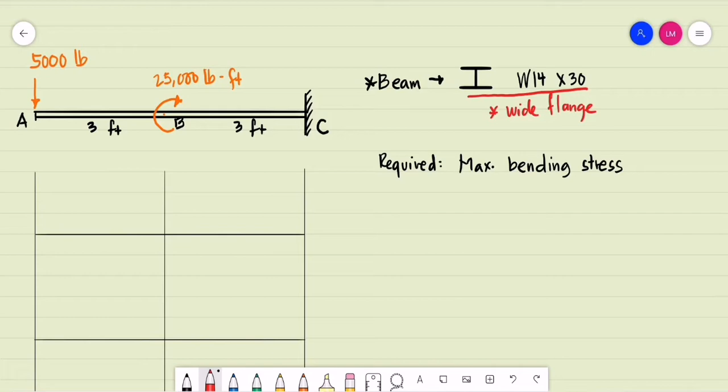Since we are required to compute for the maximum bending stress, we need to compute for the maximum moment. So for this beam, to start our solution, let us compute for the support reaction.

Since this is a fixed support, we have one vertical reaction at C, and a moment reaction at C for a fixed support. I'll be assuming that it is a clockwise moment. Let's say this is the moment at C.

Computing for the support reactions: summation of forces vertical equal to 0, assuming upward forces to be positive. Basically, we have R sub C equal to the concentrated load at A. The reaction at C is equal to 5,000 pounds, and it is upward.

For the moment at C, we do the summation of moment at C equal to 0, clockwise moments to be positive. So we have an applied moment, 25,000 pounds-foot, positive since it is clockwise, and positive 25,000 less the concentrated load 5,000 multiplied by 6 feet from A.

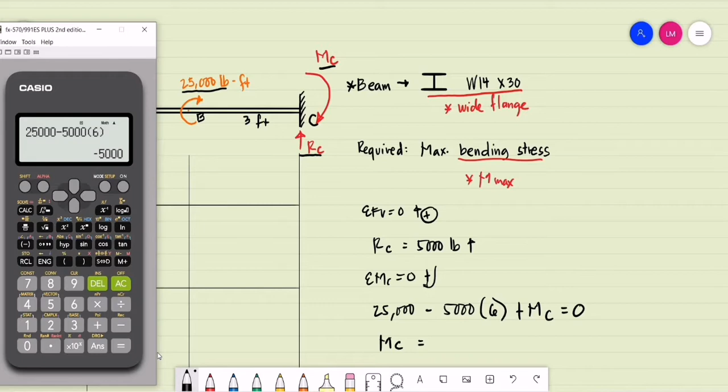Then the moment reaction MC is clockwise, assumed to be positive, and is now equal to 0. So the moment at C is equal to 25,000 less 5,000 multiplied by 6, which is negative 5,000; transposed, that becomes positive 5,000 pounds-foot.

So we have a correct assumption. This moment is clockwise; the moment at C is clockwise 5,000 pounds-foot. And we have the reaction at C, which is upward 5,000 pounds.

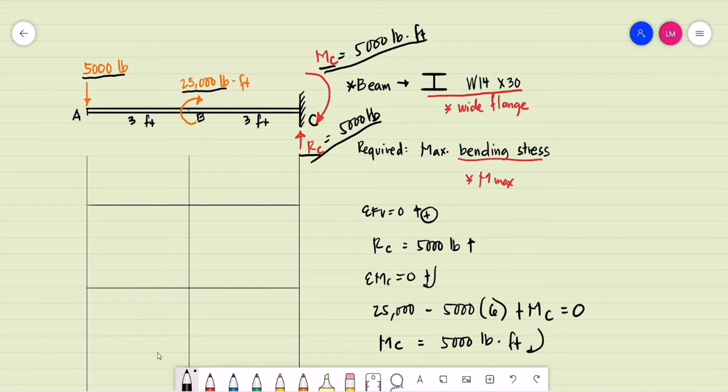So we are now ready for the shear and moment diagram. Starting on our shear diagram, starting at A, at 0, we have 5,000 pounds downwards, so we go down, a magnitude of negative 5,000.

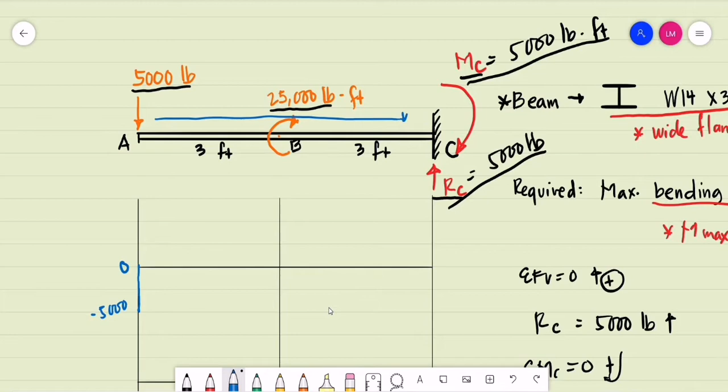As you can see, we don't have a change in shear from A to C, so we maintain this magnitude of shear, 5,000, that is negative 5,000 from A to point C. Then at C, we have a vertical reaction of 5,000 pounds upwards, which gives us a value of 0. This is our shear diagram.

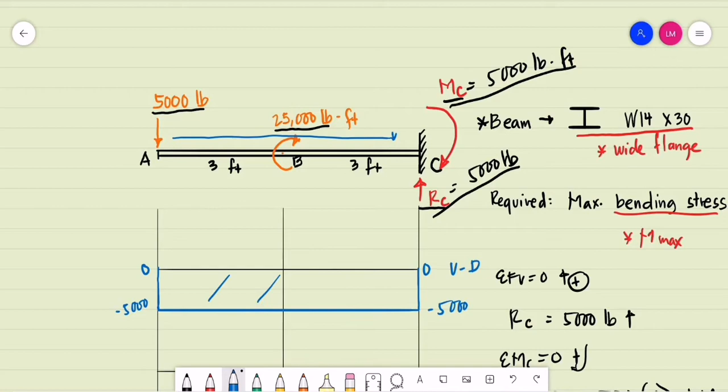So for the moment diagram, we may use the area of the shear diagram for the computation of the moments. Starting at point A, the moment at A is equal to 0 since there is a free end.

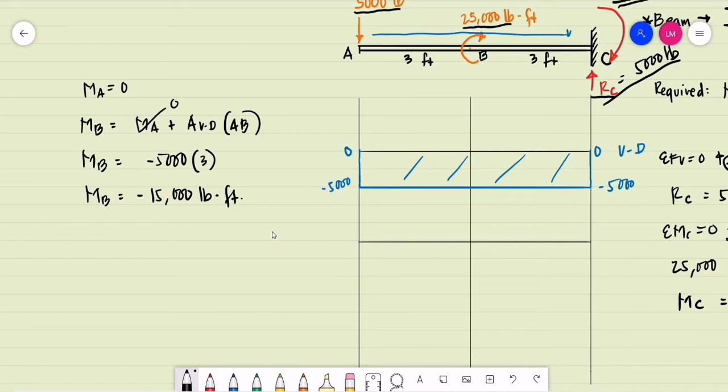If you are to compute for the moment at B, that is equal to the moment at A plus the area of the shear diagram for segment AB. The moment at A is 0, and we have negative 5,000 pounds for a length of 3 feet, giving a moment at B of negative 15,000 pounds-foot.

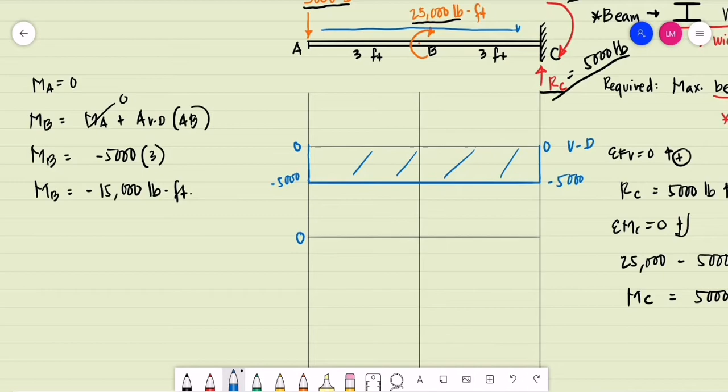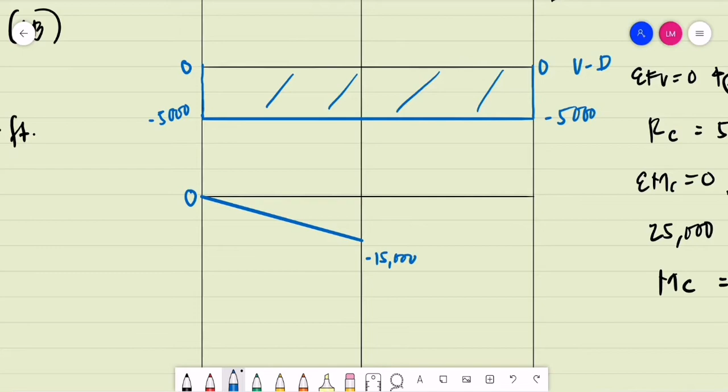So starting at A, this is 0, going to negative 15,000 pounds-foot. But as you can see on our beam, we have an applied moment of 25,000 pounds-foot, a clockwise positive moment. By the way, the degree of our shear diagram is 0 degree, so our moment diagram should be first degree.

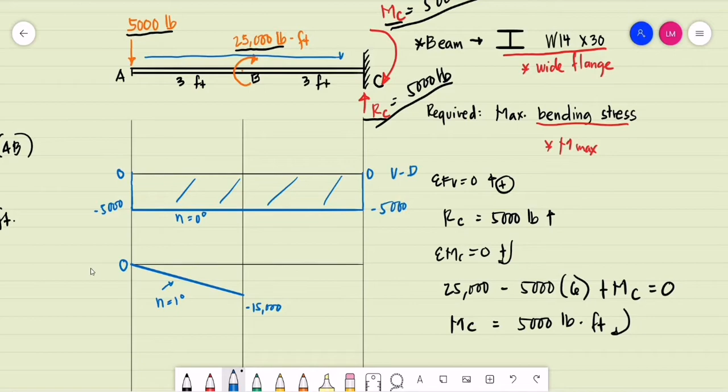So let's say another moment at point B, call it B prime. The moment at B prime is equal to the moment at B plus the applied moment of 25,000 pounds-foot, positive since it is a clockwise moment. So the previous moment, negative 15,000, plus 25,000, gives moment B prime equal to positive 10,000 pounds-foot.

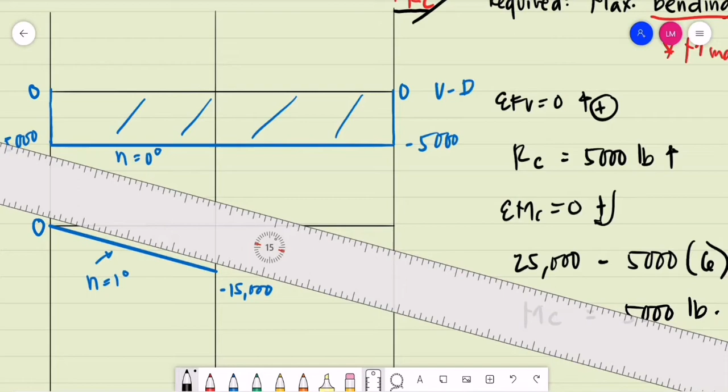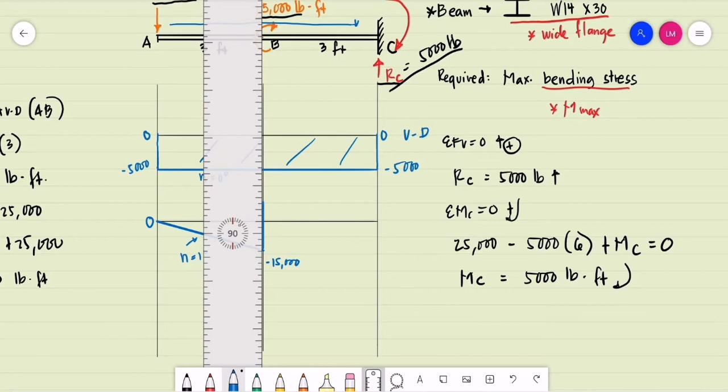So on our moment diagram, from negative 15,000, we go up to 10,000 pounds-foot, and it is positive. So negative 15,000 becomes positive 10,000.

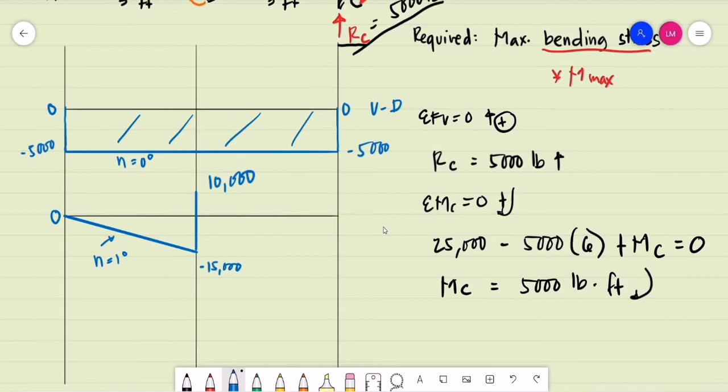Then again for the segment BC, I will be having a negative shear. So let us compute for the moment at C.

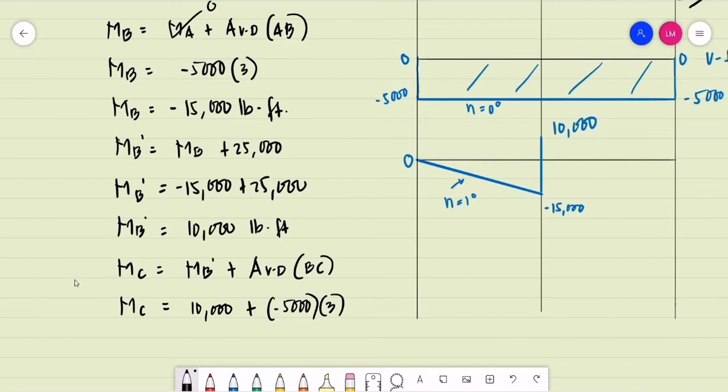So the moment at C is equal to the moment at B prime, our previous value, plus the area of the shear diagram for segment B to C. That is positive 10,000 plus the area of the shear diagram, which is negative 5,000 for a length of 3 feet, giving 10,000 minus 15,000, which equals negative 5,000 pounds-foot. That is the moment at C.

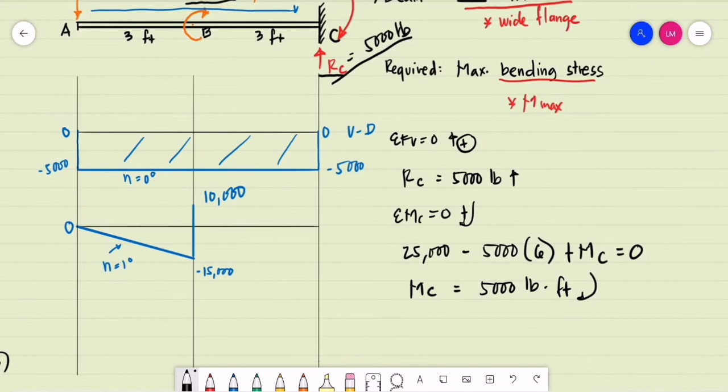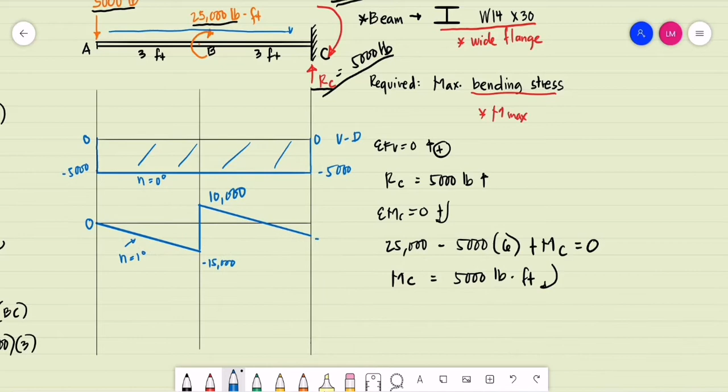So on our diagram, that goes from 10,000 pounds-foot to negative 5,000 pounds-foot.

But if we check our beam, what is the moment reaction at C? That is 5,000 pounds-foot, clockwise and positive. Doing the summation: positive 5,000 plus negative 5,000 equals zero. This completes our moment diagram.

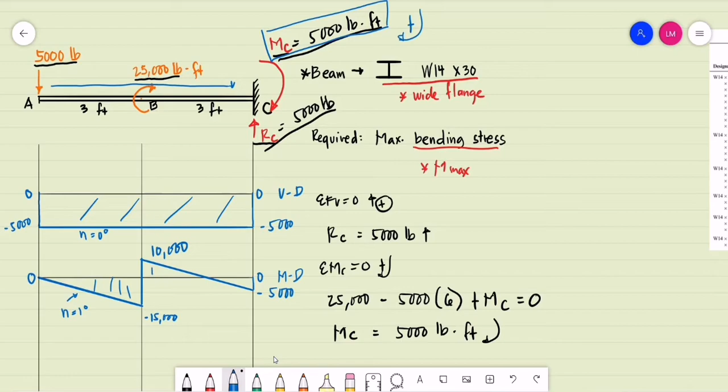Basically, the purpose of our moment diagram is to determine the maximum moment that will give the maximum bending stress. Observing our moment diagram, our maximum moment, M max, is equal to negative 15,000 pounds-foot.

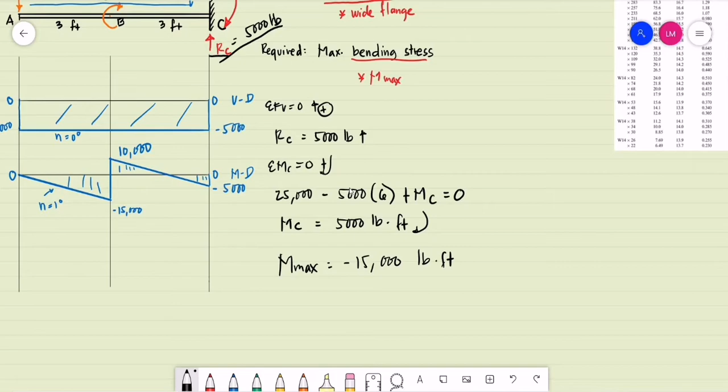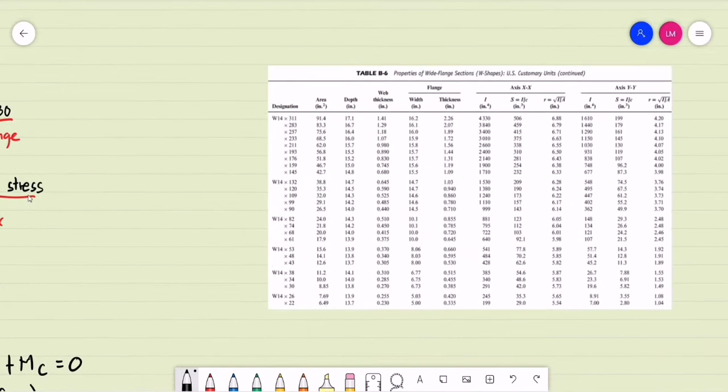For a regular beam, a wide flange beam, take note that the bending stress in tension is basically equal to the bending stress in compression, so we may use the absolute value of this moment in computing the maximum bending stress. Again, we are to use this beam, the wide flange W14 by 30. We have this list of properties of different wide flange examples, usually provided by the manufacturer.

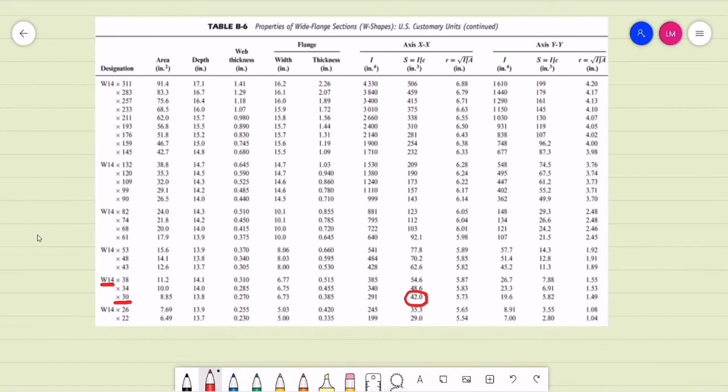So we are to use the W14 by 30. We'll be needing the value of its section modulus. The section modulus of W14 by 30 is 42 inches raised to the 3rd power.

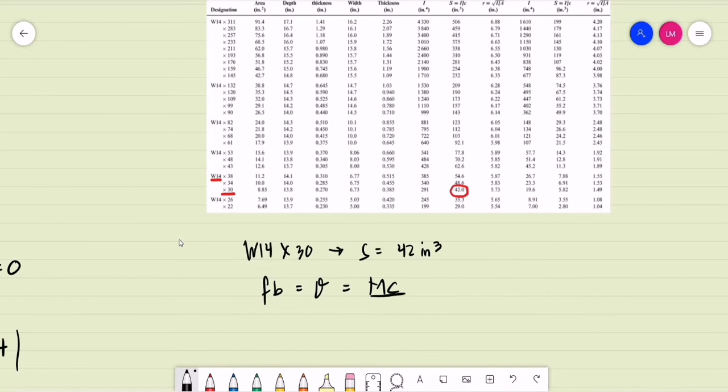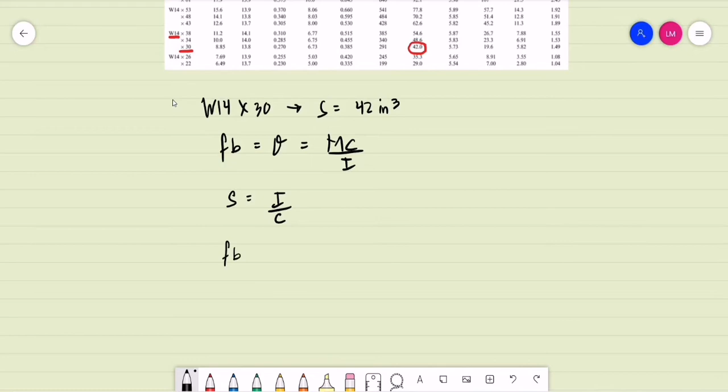So how do we compute for the maximum bending stress? That is F sub B, or sigma, equal to the moment multiplied by C, divided by the moment of inertia. But basically, the section modulus equals the moment of inertia divided by C, so we can compute the bending stress as the maximum moment divided by the section modulus.

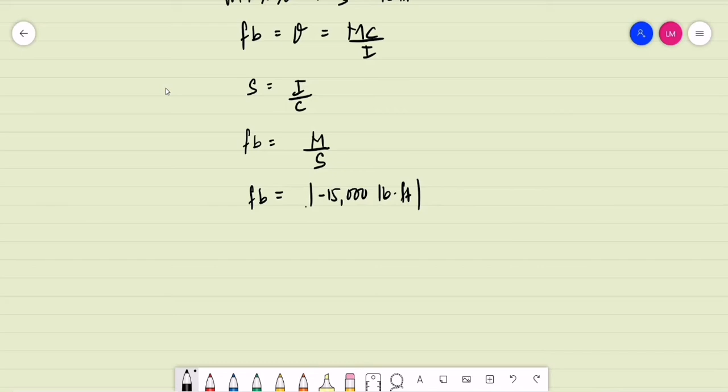So we are now to compute the maximum bending stress, F sub B. What is our maximum moment? I'll use the absolute value, which is 15,000 pounds-foot, equal for both compression and tension, divided by the section modulus. What is the section modulus for W14 by 30? That is 42 inches raised to the 3rd power.

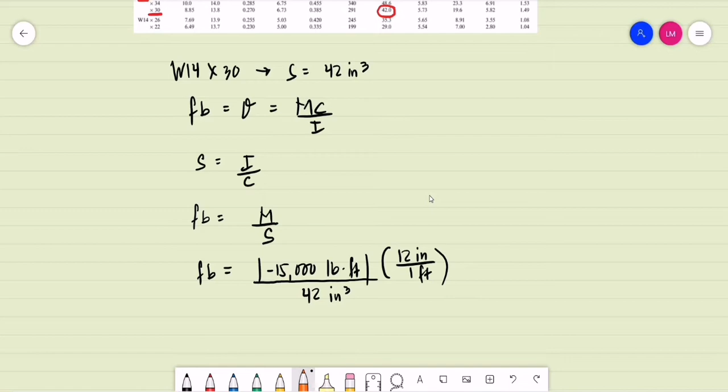For consistency of units, we multiply by 12 inches per 1 foot to cancel the unit. Computing that value, we have 15,000 multiplied by 12, divided by 42, which gives us 4,285.714.

So let's say we have the maximum bending stress, F sub B max, again for both compression and tension, equal to 4,285.714. Observing the remaining units, pounds, we cancel inches, leaving square inches in the denominator. This is the same as PSI, pounds per square inch. So this will be our solution.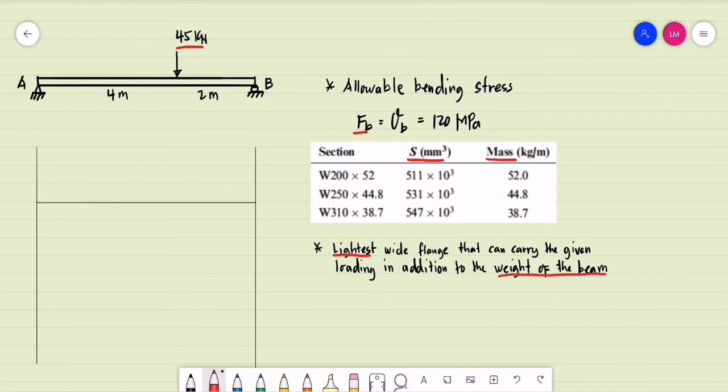So we'll have two parts of the analysis. First, we consider the concentrated load, then later on add the weight of the beam. Starting with the concentrated load, let us compute for the support reactions.

So let's say we have R sub B and R sub A. I'll be using the area of the shear diagram and moment diagram for the computation of the maximum moment. Starting with the summation of moments at A equal to 0, assuming clockwise moments to be positive, we have 45 multiplied by 4 meters, minus the reaction at B multiplied by 6, equal to 0. So the reaction at B is now equal to...

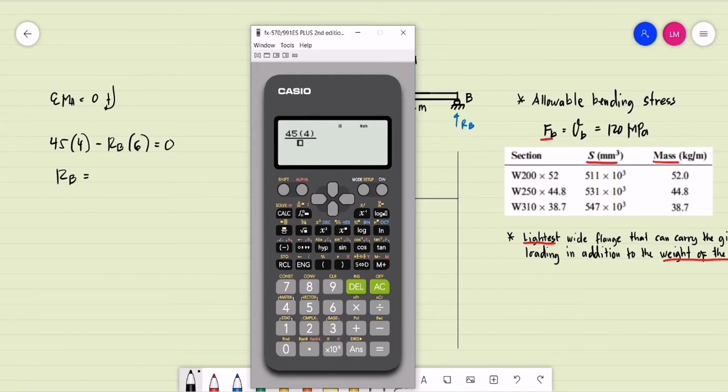That is the same as 45 multiplied by 4, divided by 6. So we have 30. This is 30 kilonewtons.

For the computation of the reaction at A, this is summation of forces vertical equal to 0, upward forces positive. We have RA plus RB, that is 30 kilonewtons, minus 45, equal to 0. So basically RA is equal to 15.

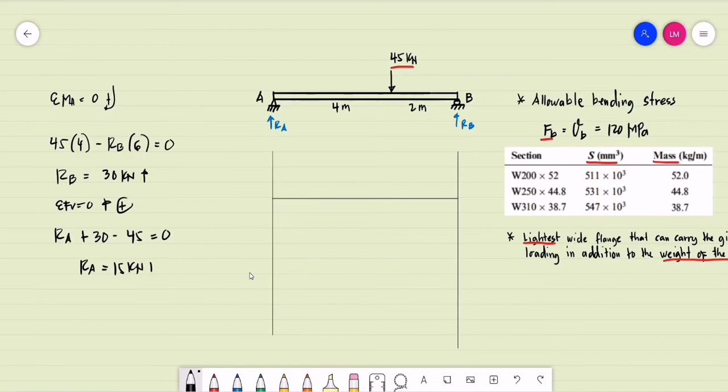This is 15 kilonewtons. For the shear and moment diagram, you can do the cut section at the location of the concentrated load. At this point, the maximum moment will occur.

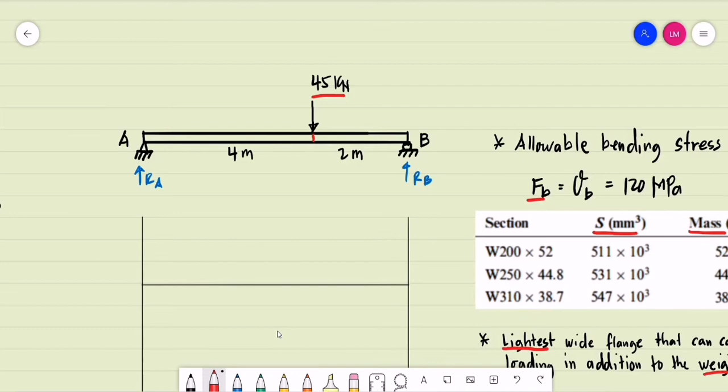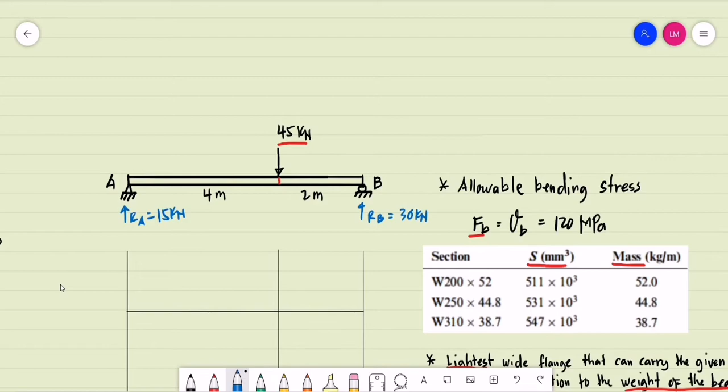But for this one, I'll be using again the area of the shear diagram for the computation of the magnitude of the moments. So we have RA equal to 15 kilonewtons, and R sub B equal to 30 kilonewtons. Starting on the left end of the beam, starting at 0, we have at A an upward support reaction of 15 kilonewtons. So from 0 to 15 kilonewtons.

If you observe on our beam, we don't have a load from A to the concentrated load. So we maintain this value of 15 kilonewtons up to the point of the concentrated load.

Then we do the summation. This is positive 15, and this is a downward load of 45 kilonewtons. That will give us a value of negative 30. So 15 minus 45 is negative 30 kilonewtons.

On our beam, from the concentrated load to point B, we don't have a load, so we maintain this value, negative 30 kilonewtons, up to point B. Then at point B, we have an upward reaction of 30 kilonewtons.

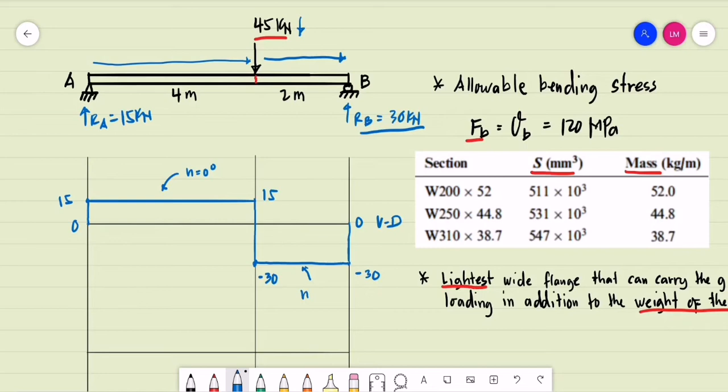So we do the summation: 30 minus 30, that is 0. So this is our shear diagram. Our shear diagram is a zero-degree graph.

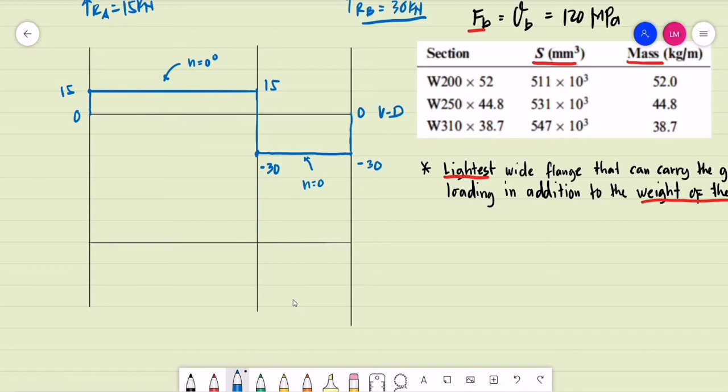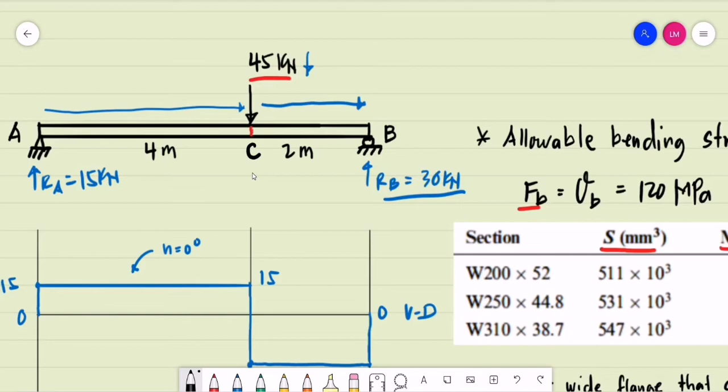So more likely on our moment diagram, we'll be having a first degree graph. How do we compute? Basically, again, the maximum moment will occur under this concentrated load, so we introduce a new point, let's say this is point C. How do you compute for that? That is the same as the area of the shear diagram.

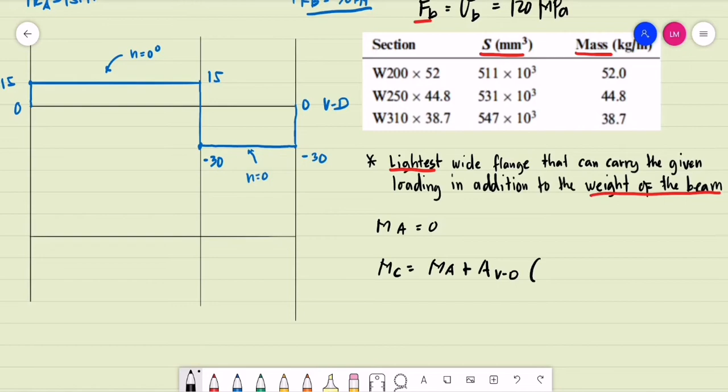So basically we have the moment at A equal to 0, since that is a simple support. Let us compute for the moment at C: that is the moment at A, plus the area of the shear diagram from A to C. So the moment at C is equal to the moment at A, which is 0, plus the rectangular area, that is basically 15 multiplied by 4, equal to 60 kilonewton meter.

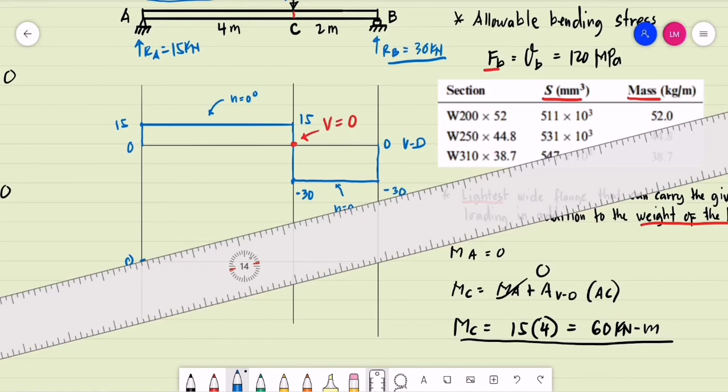Most probably this is our maximum moment, since that is the only point wherein the value of shear is equal to 0 for the entire span of the beam. So that is 60 kilonewton meter, starting at 0 at A, to 60 kilonewton meter at point C. So we have a magnitude of 60 kilonewton meter.

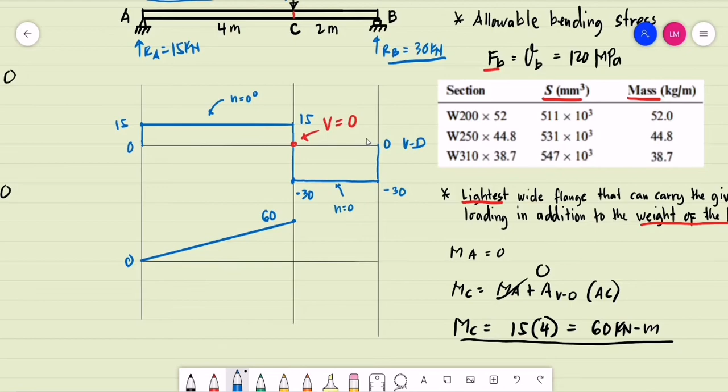Now, if we are to determine the moment at B, that is obviously equal to 0, since that is a roller support. The moment at B is equal to the moment at C plus the area of the shear diagram from C to B. So our previous moment is positive 60, and that is a negative area: minus, negative 30, for a length of 2 meters. This gives 0, and it is a first degree graph.

So this is 0. This is for our moment diagram. The degree of the graph is equal to first, it is a first degree graph.

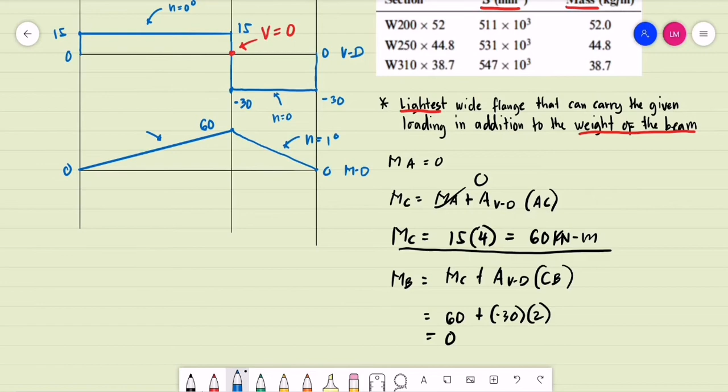So based on our moment diagram, obviously our maximum moment is 60 kilonewton meter. So we have M max, the maximum moment is equal to 60 kilonewton meter.

Okay, how do we compute for the bending stress? We have the allowable bending stress equal to the moment multiplied by C divided by I, the moment of inertia, or that is the same as the moment divided by the section modulus.

So what will be the required section modulus for a moment of 60 kilonewton meter if the beam has an allowable bending stress of 120 megapascals? So we have the allowable bending stress is 120 megapascals, the same as newtons per square millimeter, equal to the moment, 60 kilonewton meter. So we are just to convert some units.

This is 1000 newtons to 1 kilonewton, multiplied by 1000 millimeters to 1 meter, divided by the required section modulus. So we'll be having the required section modulus equal to 60 multiplied by 1000 for the kilonewton, another 1000 for the meter.

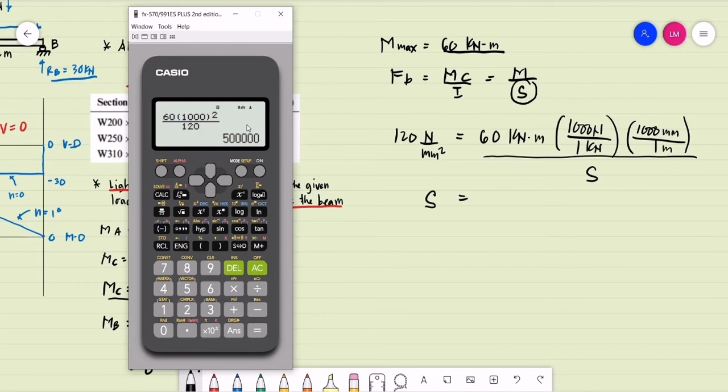So this is 1000 squared divided by 120, giving us 500. The required section modulus is 500 times 10 raised to 3. If you do unit analysis, cancelling kilonewton, newtons, and meter, and mm squared multiplied by mm, this is basically section modulus, expressed in units of mm cubed. So the required section modulus for a moment of 60 kilonewton meter and an allowable bending stress of 120 megapascals is 500 times 10 raised to 3 millimeters cubed.

If you observe our options, all of them are greater than 500 times 10 raised to 3. So when it comes to section modulus, we can use these three sections. But again, the requirement on this problem is that we are looking for the lightest. So the lightest is with a mass of 38.7. Therefore we may conclude that we are to use the W310 by 38.7. This is our wide flange section.

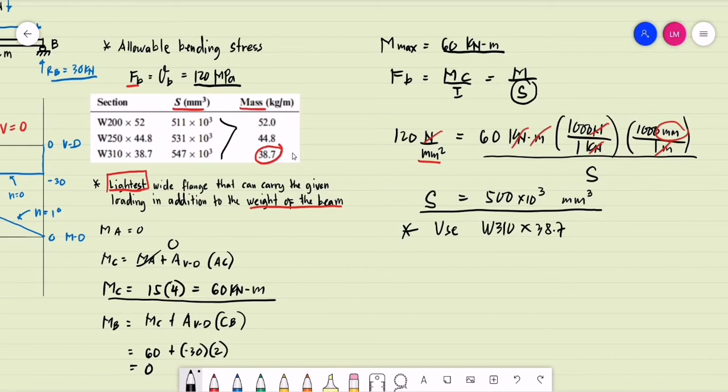Okay, so we are now to reconsider what will be the total weight to be carried by the beam, including its self-weight. Let's say that will be a uniformly distributed load. This is for the self-weight of the beam.

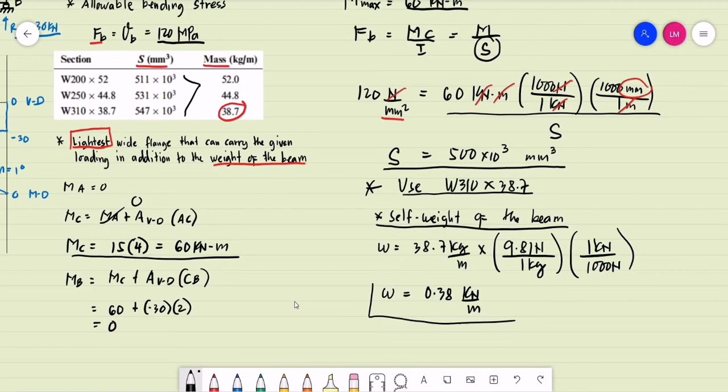We have the self-weight as 38.7 kilograms per meter. All you have to do is convert this to kilonewtons, multiplied by 9.81 newtons per 1 kilogram, then multiplied by 1 kilonewton per 1000 newtons. So what will be the self-weight of the beam? Take note, this is the self-weight of the beam, we need to consider this. So we have 38.7 multiplied by 9.81 newtons per kilogram, multiplied by 1 kilonewton over 1000 newtons. So we have that as 0.379647, or maybe we can use 0.38 kilonewton per meter. So we are just to add this as an additional load on our beam.

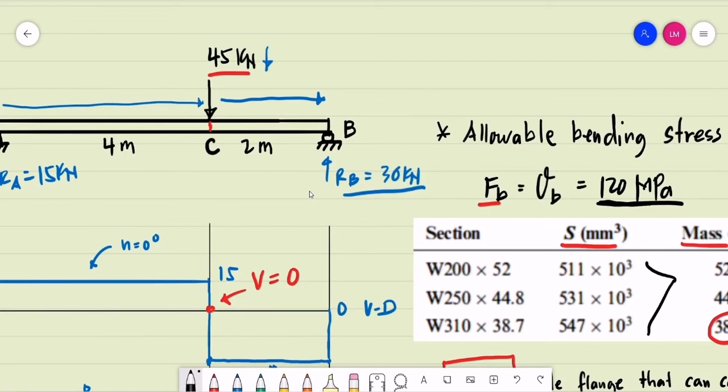And if we need to check whether we are not to exceed the allowable bending stress, to continue our analysis, we have now this beam, the W310 by 38.7, with a section modulus of 547 times 10 raised to 3 millimeters cubed. And the allowable bending stress is 120 megapascals. So take note, we are now considering the self-weight of the beam, the 0.38 kilonewtons per meter. And again, we choose this beam because it is the lightest beam with a section modulus greater than 500,000 millimeters cubed.

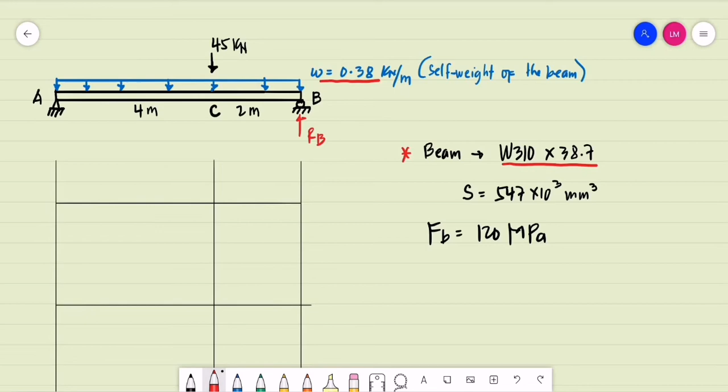So computing for the maximum moment, let us determine the actual stress using this beam. Let's say we have the support reactions, new support reactions this time. So we may do a summation of moment at A, equal to 0, assuming clockwise moments to be positive.

So that is, we have 45 multiplied by 4, plus the uniform load 0.38 kilonewton per meter multiplied by the total span, that is 6 meters. So the equivalent single force of this uniformly distributed load, the self-weight of the beam, is assumed to act midway or mid-length of the beam, so at a distance of 3 meters from A. 0.38 kilonewton per meter multiplied by 6 meters, that is the equivalent weight acting at a distance of 3 meters from A, minus the reaction at B multiplied by 6 meters, equal to 0.

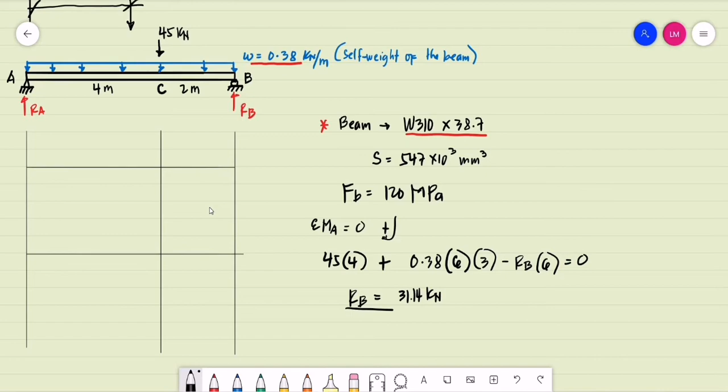So you have now the support reaction at B. We have 45 multiplied by 4, plus 0.38 multiplied by 6, multiplied by 3 meters, to be divided by 6. So we have 31.14 kilonewtons. This is now 31.14 kilonewtons for the support reaction at B.

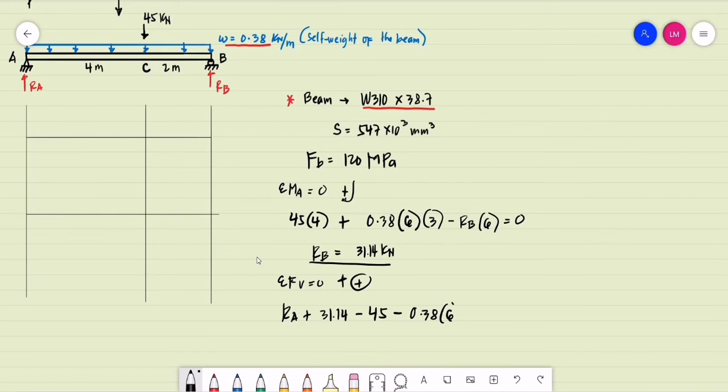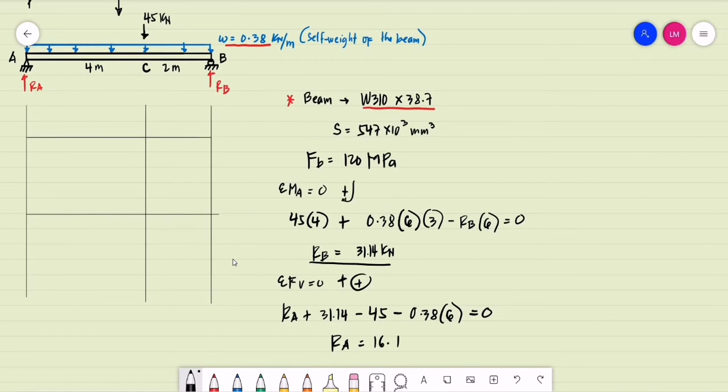Then for the support reaction at A, we may do summation of forces vertical equal to 0, assuming upward forces to be positive. So we have R sub A plus R sub B equal to 31.14, minus the concentrated load 45 kilonewtons, minus the self-weight of the beam, that is basically the uniform load 0.38 multiplied by the total span, 6 meters, equal to 0. So we have the reaction at A, this is 31 less 45 less 0.38 multiplied by 6 meters, so that is 16.14. This is 16.14 kilonewtons. So these are the support reactions.

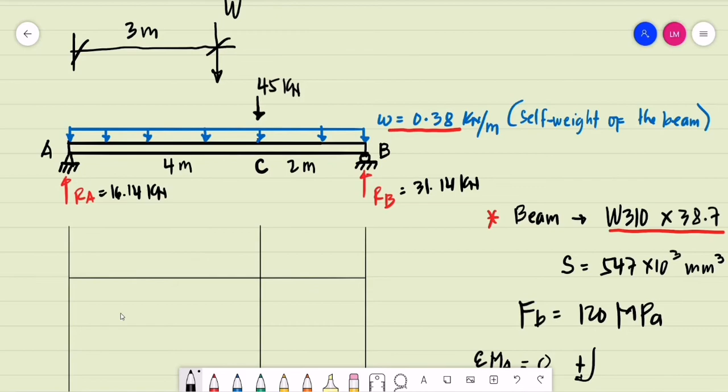Okay, let us draw the shear diagram. We have R A equal to 16.14 kilonewtons, R sub B equal to 31.14 kilonewtons. For the shear diagram, starting at 0, we go up to a value of positive 16.14. Take note that this time we have a uniformly distributed load, and this is a 0 degree load, so we'll be having a first degree diagram.

Let us do the summation for a span of 4 meters. That is 16.14 less the uniformly distributed load for a span of 4 meters, that is 0.38 multiplied by 4. And this is now equal to 14.62.

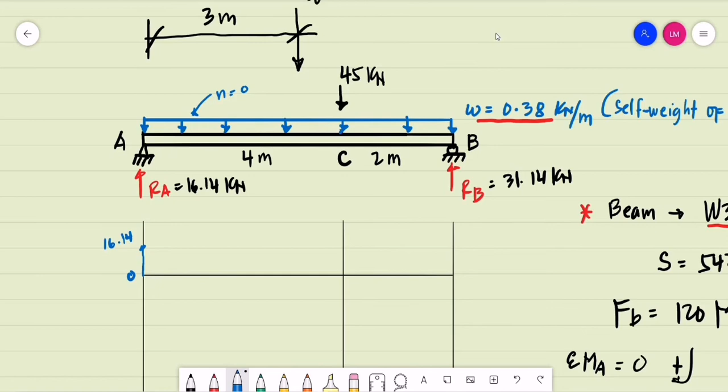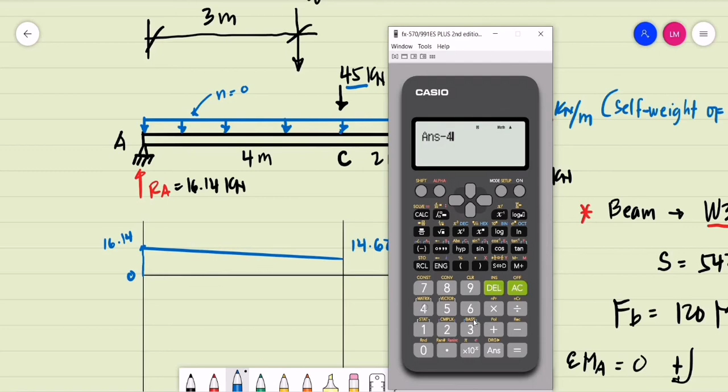So we have a magnitude of 14.62 kilonewtons. Then we have a downward concentrated load of 45, so that is minus 45, and this is equal to negative 30.38. So we go down to a value of negative 30.38.

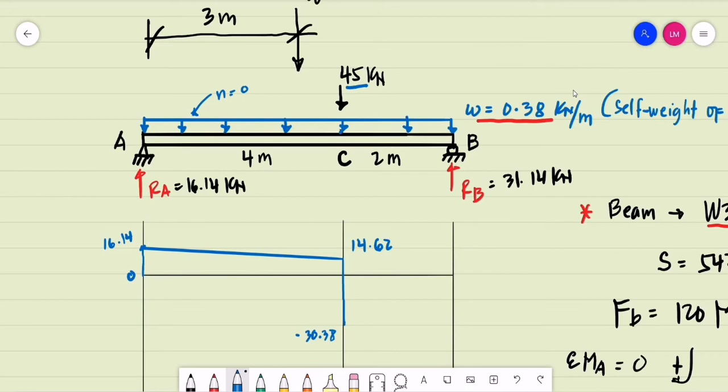And then again, considering the uniformly distributed load, that is 0.38 kilonewton per meter for a span of 2 meters. So that is minus, we have 0.38 multiplied by 2 meters, and that will give us negative 31.14. Going to point B, this is now negative 31.14. So at B, we have a support reaction of 31.14. If you do the summation, that will give us 0.

So this is for our shear diagram. This time, our shear diagram is a first degree graph.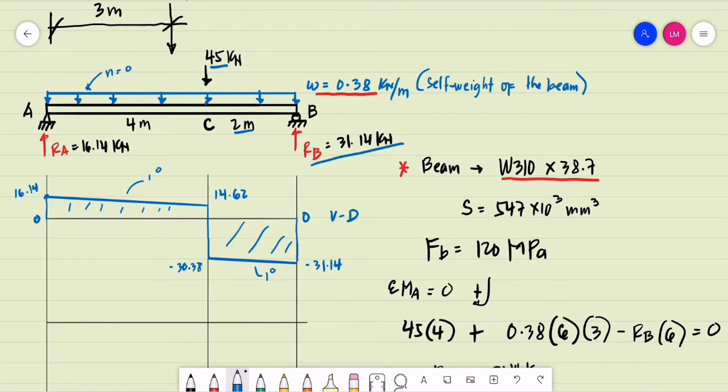For the moment, for our moment diagram, again starting on the left end of the beam, this is starting at 0. How do we compute for the moment at C this time? We have the moment at C is equal to the moment at A, plus the area of the shear diagram from A to C. So moment at A is equal to 0 since that is a simple support.

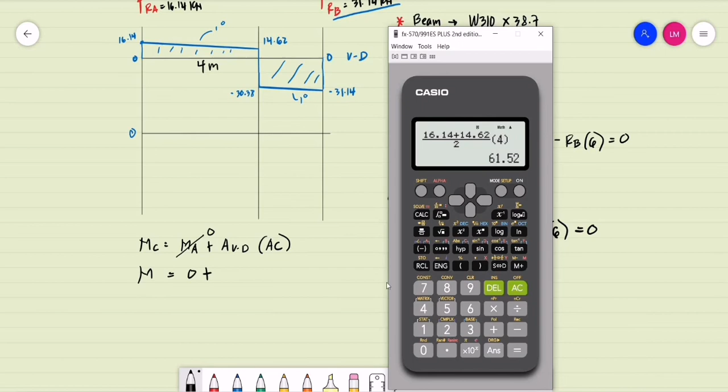This is 0. This time, this is a trapezoid for a length of 4 meters. So the area of a trapezoid, we have the parallel bases: 16.14 plus the 14.62, this is divided by 2, then multiplied by the length of that segment is 4 meters. So we have that as 61.52. If you are to write that one, that is 16.14 plus 14.62, divided by 2, multiplied by 4.

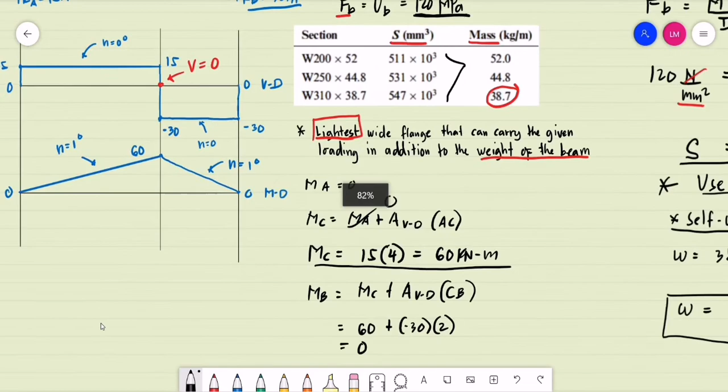This is the moment at C and the maximum moment is equal to 61.52 kilonewton meter. So we have a very small increase in value compared to our previous analysis. From our previous analysis, our maximum moment is only 60 kilonewton meter, so we have an increase of 1.52 if we are to consider the self-weight of the beam.

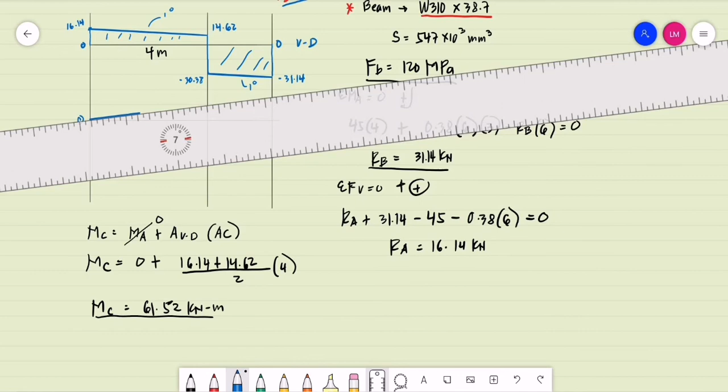But this is an important step to check if we don't really exceed the allowable bending stress. We have 61.52 kilonewton meter. So from A to point C, supposedly this is a curve graph. So from A to point C, it should be a second degree graph, a graph that opens downwards.

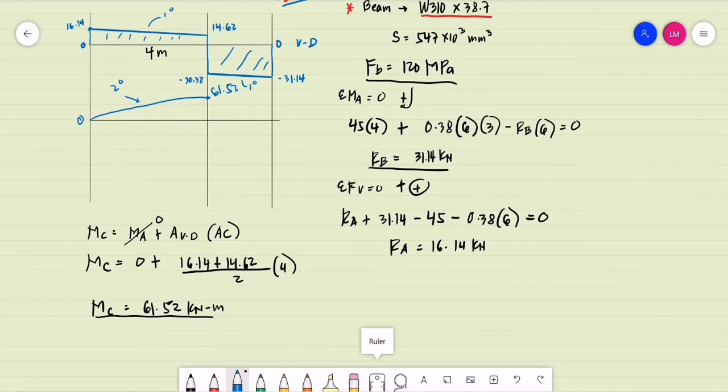It's a second degree graph. The magnitude is 61.52. Then, as a checking, what will be the moment at B? So from 61.52, we are just to subtract this negative area of the shear. So minus, that is also a trapezoid. We have 30.38 plus the 31.14, this is divided by 2, multiplied by 2.

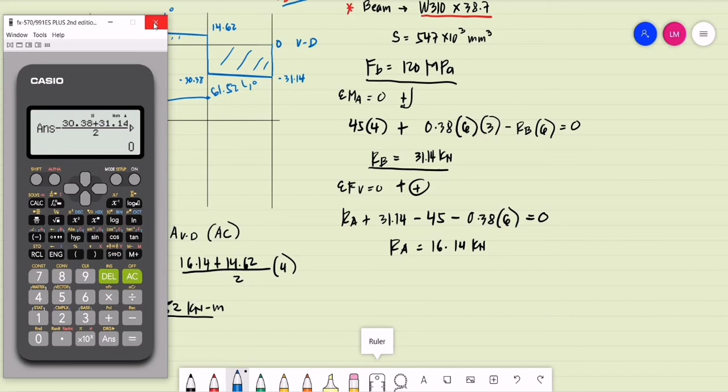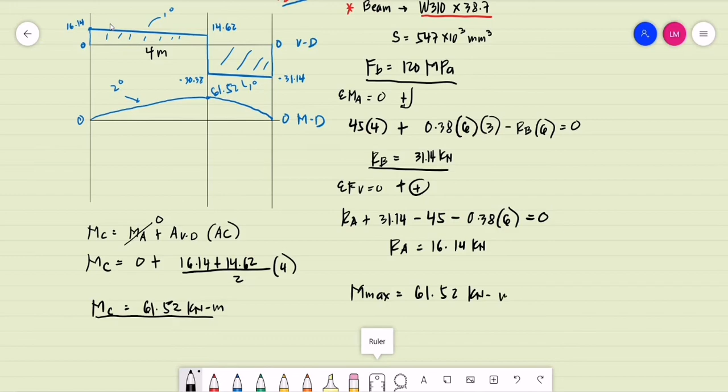That is 0 as a checking. So the moment at B is 0. So this is a curve that opens downwards, ending at 0. This is for the moment diagram. But anyway, the important value is the maximum moment. The maximum moment for this beam will be equal to 61.52 kilonewton meter. Let us see if we are not to exceed the allowable bending stress of 120 megapascals.

So we have, this is now the actual stress, the actual maximum bending stress. So actual bending stress, we are using small letter. So the actual bending stress is equal to the moment divided by the section modulus.

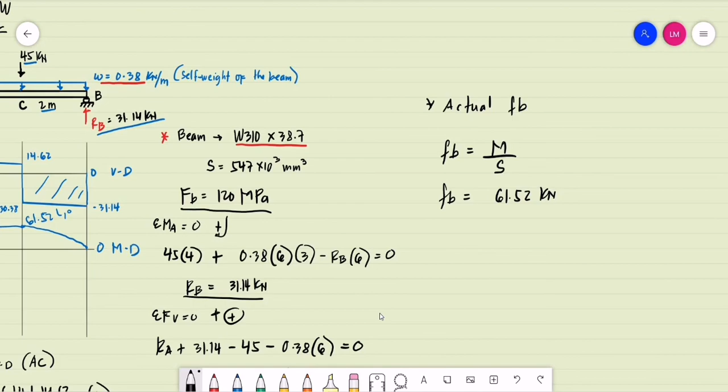We have the bending stress is, okay, what is our maximum moment? That is 61.52 kilonewton meter. So we are just to convert this one, multiplying 1,000 newtons is to 1 kilonewton, and we have 1,000 millimeters is to 1 meter. So this is to be divided by the section modulus of the chosen wide flange, that is 547, divided by 547 times 10 raised to 3 millimeters raised to 3.

So doing unit analysis, cancelling kilonewtons, meter, so remaining unit is we have Newton, mm cubed, mm, so remaining unit in the denominator will be mm squared. So that is Newton per square millimeter.

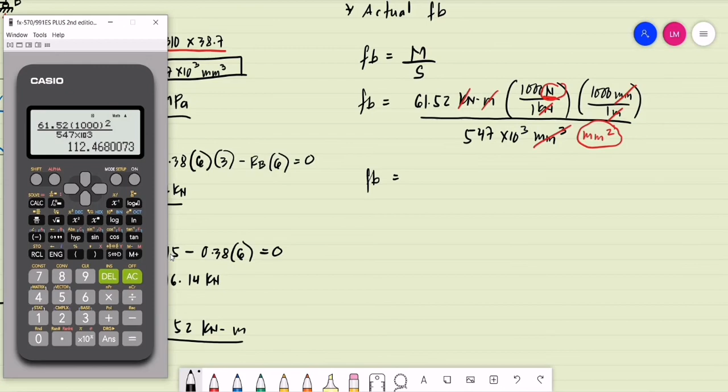So we have now the actual bending stress is equal to, that is the same as 61.52 multiplied by 1,000 squared, this is divided by the section modulus of the chosen section, 547 times 10 raised to 3. So we have the actual bending stress is 112.468. Newtons per square millimeter is megapascal.

To be safe, to have a safe design, the actual bending stress should be less than or equal to the allowable. So that is, we have the actual bending stress should be less than or equal to the allowable bending stress. So again, small letter for actual, capital letter for allowable.

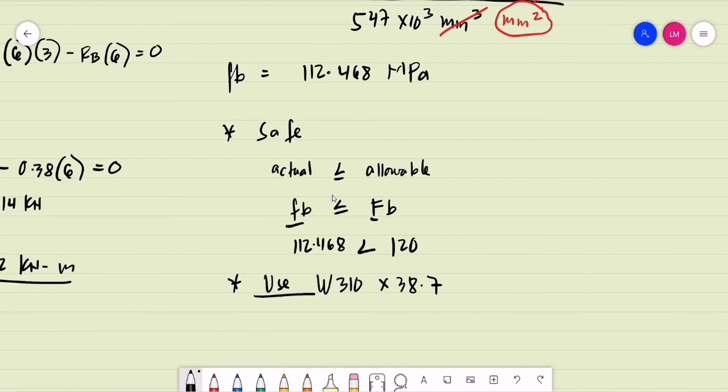So our actual bending stress is 112.468. Obviously, this is less than the allowable bending stress, which is equal to 120 megapascals. So therefore, we can finally conclude that we can use the W 310 by 38.7 as the wide flange to carry the load, considering the concentrated load, the 45 kilonewtons, and the self-weight of the beam. Take note, in actual design, we need to consider the self-weight of the structure.

So this will be our solution.